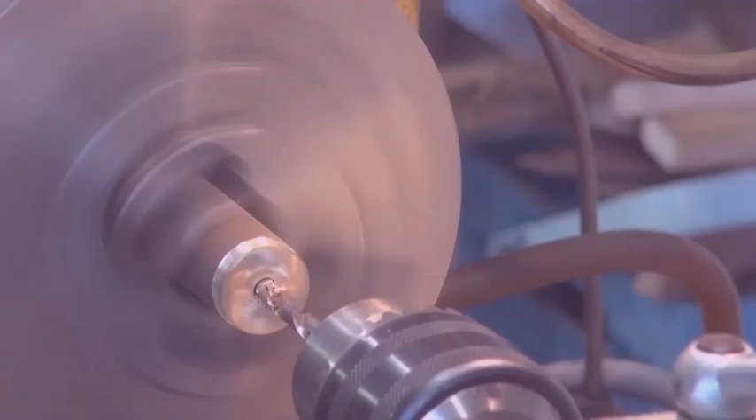A few days ago, Abom79, everybody knows him of course, posted a video where he shows us his work on straight edges with the shaper. And then at one moment he has a little screw up because the clapper box was in the wrong angle.

Now, first of all, I want everyone to know that Adam is one of my all-time heroes, machining heroes. He's one of my favorites. So there's no way I'm gonna criticize him. That's out of the question.

Now, the part of the video we're interested in is, I check on my paper, between 9:40 and 12:30. There's a link in the description, so if you want to check this video out, I think it's a good idea to re-watch it because it's really interesting work. As always with Adam, he's always really interesting.

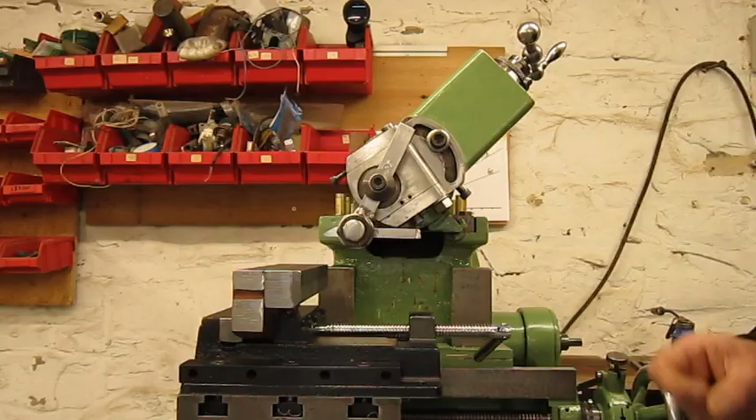I'm absolutely not pretending to be better or smarter than anybody else, but with this video, I want to add some explanations because I see all over YouTube shaper videos, and sometimes people do it wrong. In fact, it's not that complicated.

I recreated the same situation as in Adam's video. This is a straight edge, with a bit of imagination. You can see it, this is the top surface, and here you can hardly see it, but I made a 45 degree. Now let's start with the beginning, the angle of the clapper box, this side or that side.

To begin, we will start with the most common situation. We're gonna work this surface horizontal. So of course, at that moment we put the clapper system and all this down feed system at 0 degrees.

Move the part. Ready to cut. Now if we cut, we start on this side and the tool will cut in that direction, which means that after a few cuts we will have this situation: the surface, the cut, and the finished surface.

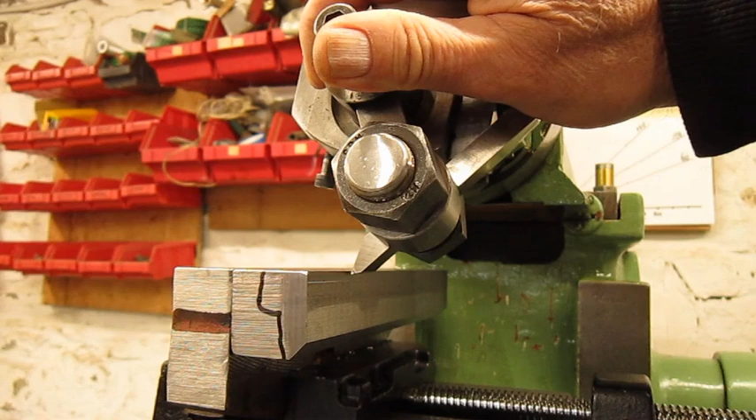Now the shim is stuck between the tool and the part. So if we move the clapper backwards, the shim falls out, which means we have the clearance we need. You can even see the difference. Now we have maybe 0.5 millimeter, and now we have 2 millimeters.

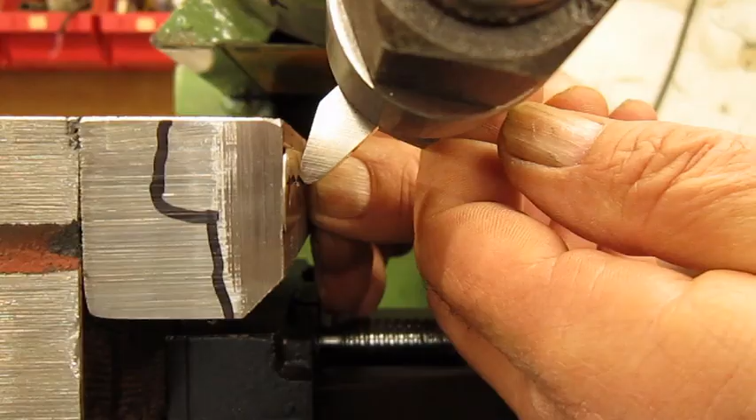I hope until now this was convenient and not too complicated, but I don't think so. I think it is really simple.

The trick is, if you could put a couple of eyes here, then you think that the eyes always have to look at the cut.

Easy, convenient. Now, as you have noticed, I suppose, the clapper did not change angle. So first I was telling about the horizontal surface, clapper was this way. Vertical surface, clapper was the same way, because we cut in the same way. This 45 degrees is also in the same way.

So all we have to do is put here 45, and the clapper is in the right angle. The eyes will look at the cut. Okay, the cut is below here, but I will set it up and I will prove it's right.

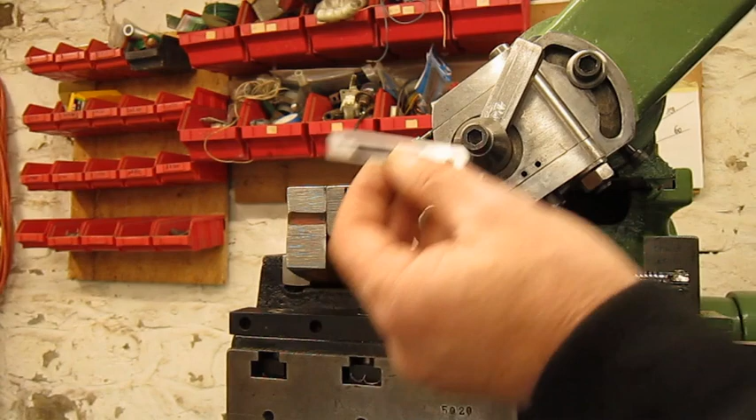Of course, on Adam's machine, this 45 degrees was more from this corner to down here, but I suppose you got the point. And to prove that the clapper is indeed in the right way, we will use our shim again. Squeezed, falls out.

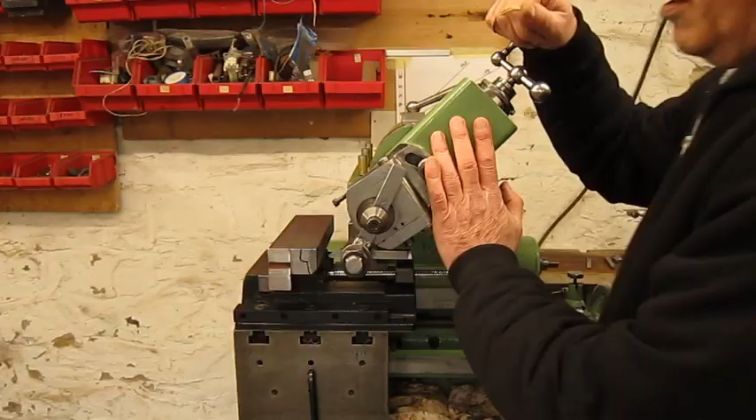I hope that was convenient. Let's take a cut. If you make cuts, especially at an angle, before starting always turn the machine by hand at least a full stroke to make sure not to crash into something, because this tool holder system can crash in the dovetails. It's possible. Of course it's your machine, you do whatever you want with it, but beware, it's possible to break it. Now I'm going to use these rubber bands, let me show you.

See, small machine and the tool lift is lifting itself. Still lifting a little bit, but I suppose you got the point. What I miss the most on this machine is an automatic down feed. I'm feeding by hand, kind of manual labor.

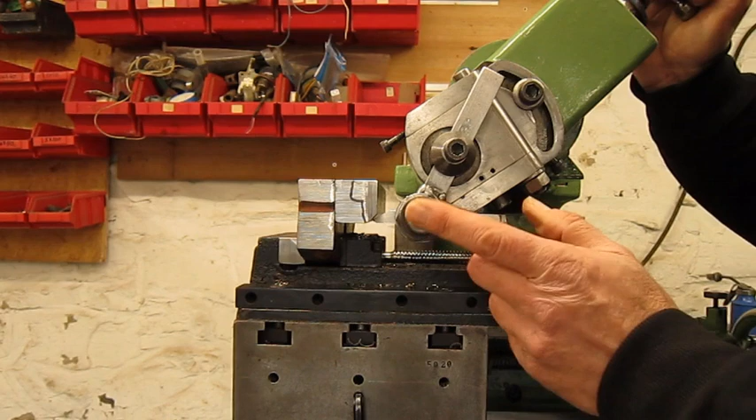45 degrees and still alive. In Adam's video you can see that on the backstroke this tool is dragging on the cut surface. Here you see there's a lot of free space. I don't have this problem, and I think I know what happened, but I'm not sure. Let me explain on the blackboard.

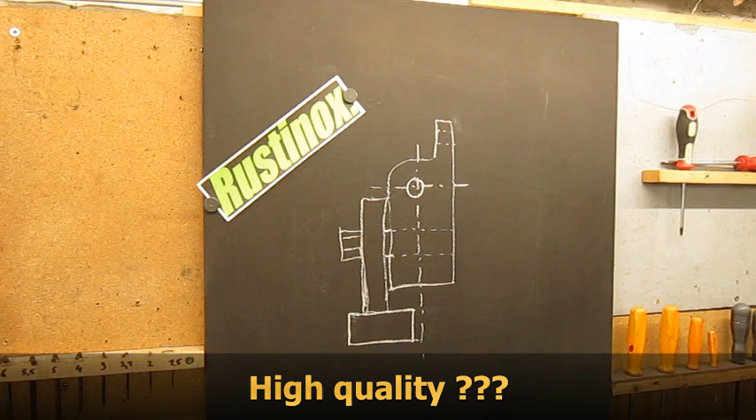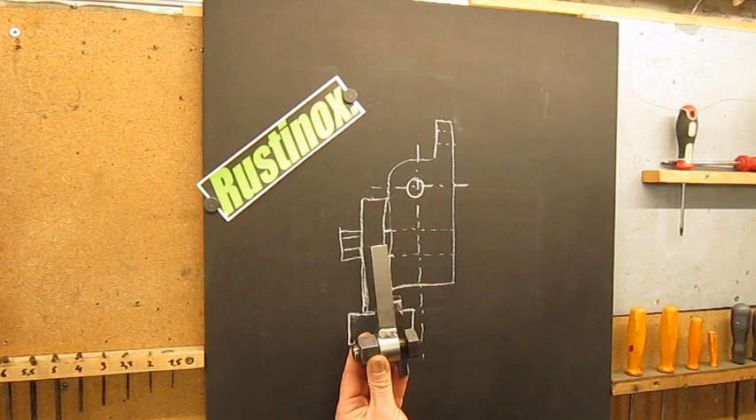I made here a high quality sketch of the clapper system on the shaper. Here of course is the ram, the clapper box with the clapper inside, we can see it. The ram is moving that way, the cutting stroke. And here comes the cutting tool in the tool holder, same as this one. Now, with this kind of tool holder, you can put the tool on this side and cut that way, or flip it over.

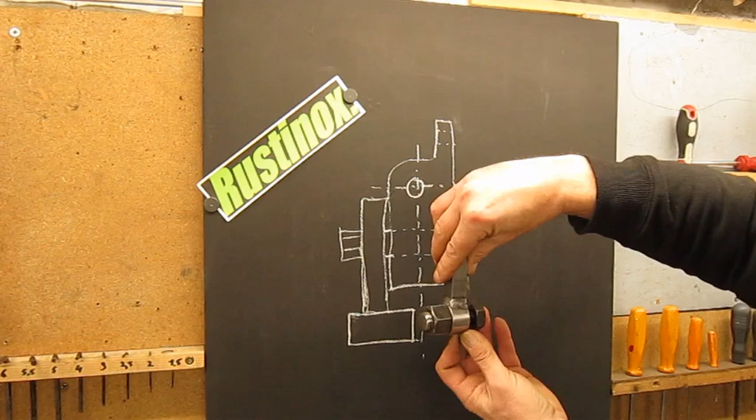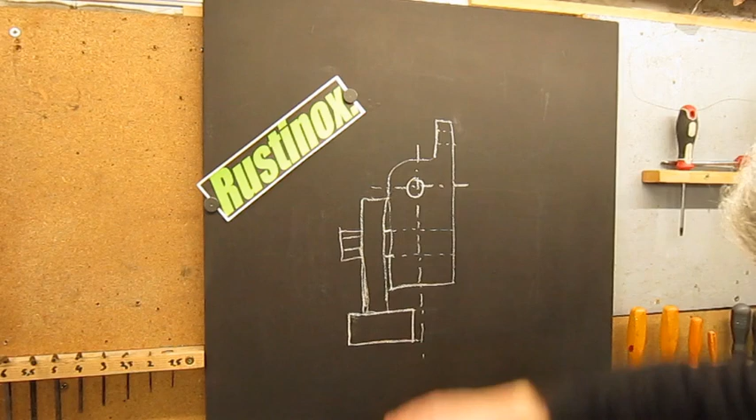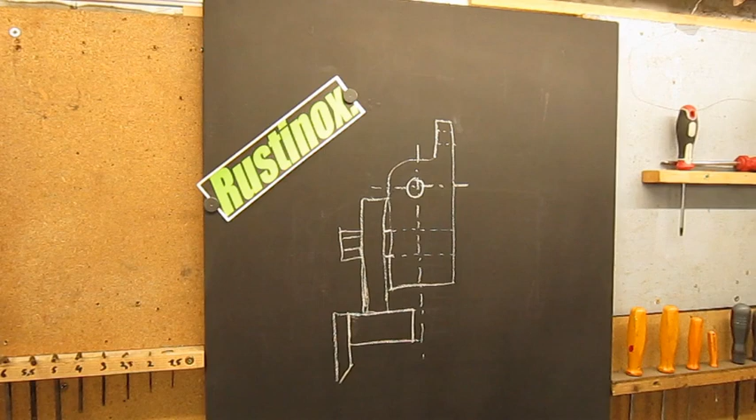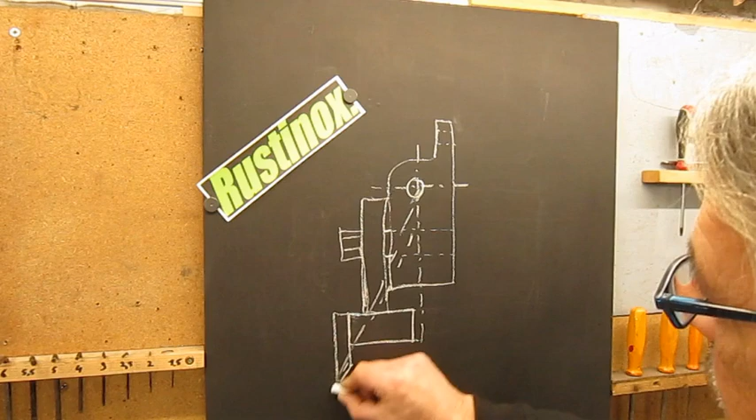Now you're going to say, what's the difference? Take a piece of chalk. The cutting tool comes here, yeah? Something like that. And you see that this is the pivot point of the clapper. We're going to draw a straight line through it. This is a straight line.

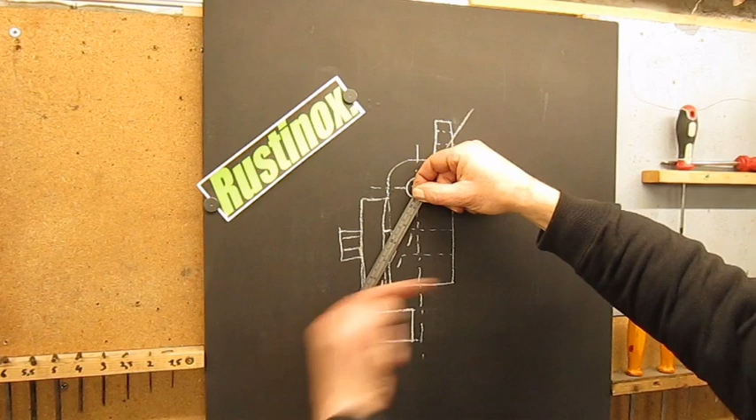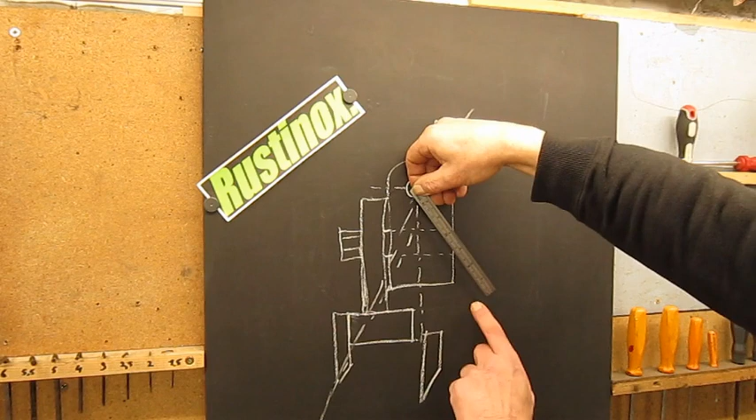If now the clapper moves up on the backstroke, the tool is lifting. That's not complicated. We're going to put the tool on the other side of this pivot point, right here somewhere. So what's happening is that before the tool starts to lift, first it goes down. I'm going to exaggerate a bit. The tool is here, the clapper box is going to lift that way. So first the tool goes down and then it goes up.

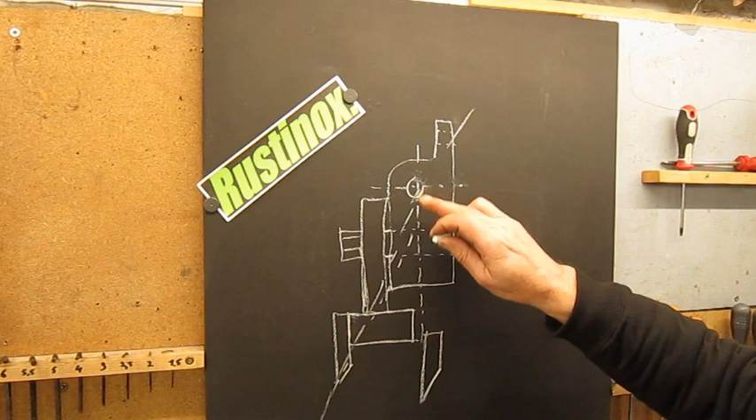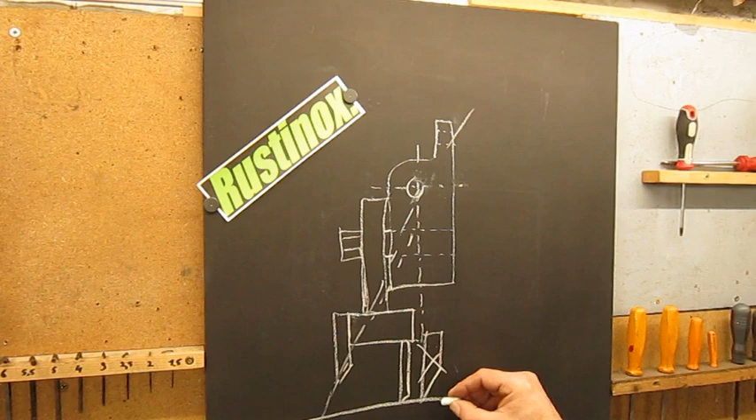So if you install a tool in the tool holder, always make sure you are in front of this pivot point, line, center thing, I don't know how to call it. So this one, not good, maximum here somewhere. Of course, I forgot to say, if the tool goes down before it goes up, this is the part we're cutting, the point of the cutting tool will dig into the workpiece.

I'm not saying the problem Adam had on his machine was because the tool was behind the pivot point of the clapper, or maybe the clapper didn't have enough angle in it. It's a bit hard to see in his video, but of course that's not the point of his video, he's making a straight edge. If you see the cutting surface, there's not even one ding in it, nothing, so it means the clapper box was in the right position. Oh, and Adam, if you're watching this video, you're one of my heroes.

To conclude, maybe two little points. First of all, I hope I didn't offend anyone, because it was just an addendum to Adam's video, and I hope everybody appreciated it. If not, if you did, leave a comment. Point number two, I also hope that someone one day will make a video about this topic and can explain it way better than I did. I'm not a teacher, but I do what I can.